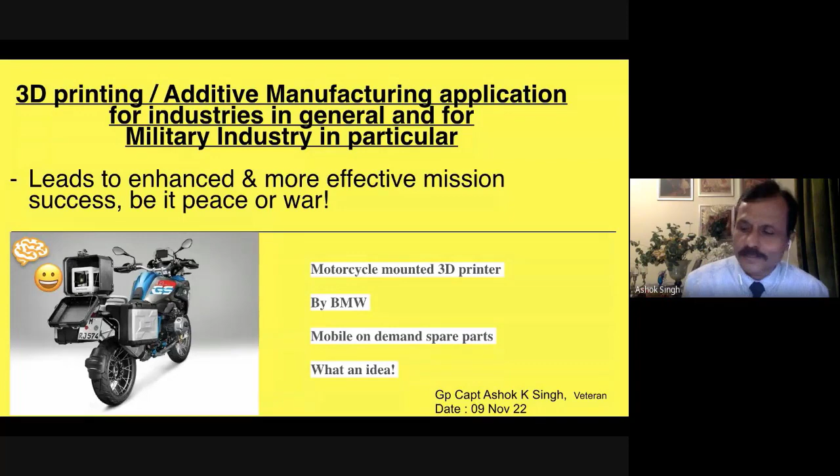So what we see is, you have a BMW motorcycle, and BMW has used its mind very well. They have put a small 3D printer at its back, and this helps support people who are using BMW in their maintenance, getting their spare parts on demand, on site. And I think it's something very apt for the MRO industry moving ahead.

I have personally encountered many times, when dealing with 3D printing technology, that we go to the end user whom we feel would be a good prospect. And when we say, hello, we would like to talk to you about 3D printing, they say, look, kindly contact the IT center or IT department. And sometimes it takes us a little while to drive the point home that what we are dealing with is a machine. It's not something purely IT. So that's a little misnomer people have, and there is still a lot of gray between the black and white.

Coming to somebody from Saint-Gobain, they said that they had 100% return on investment within 6 months of purchasing a printer. Most of the time it is said that it's very expensive. So it depends on what your need is and what the circumstances are, and that would determine whether it is expensive or not. I would give you one example, which is from Vedanta. It's a well-known global company, and they have a mine operating in Jharsuguda. It's a hinterland. There's not much connectivity.

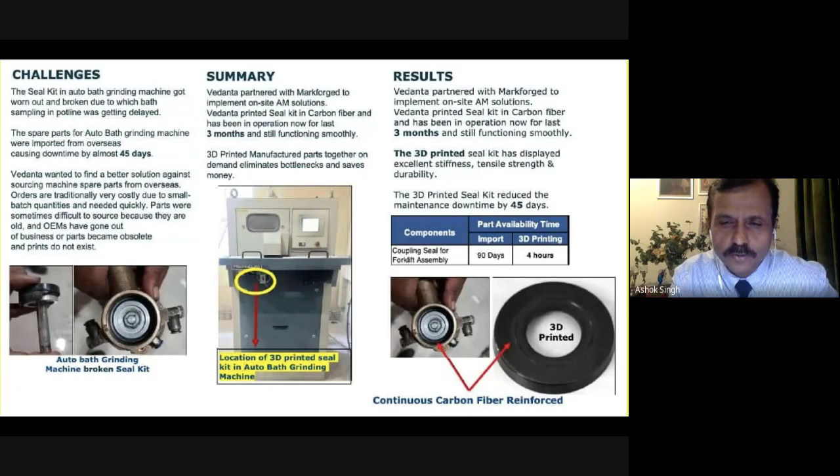With this 3D printed part, they could find that they can use it well, they can get it within 4 hours, and it has saved them a very substantial amount, which they have not shared. Similarly, there's one more part in a forklift, again a continuous carbon fiber reinforced seal, and this they could produce in 2 hours. The import time used to be 45 days. So if your machine is lying idle for 45 days, in commercial parlance, it's quite a huge amount of money.

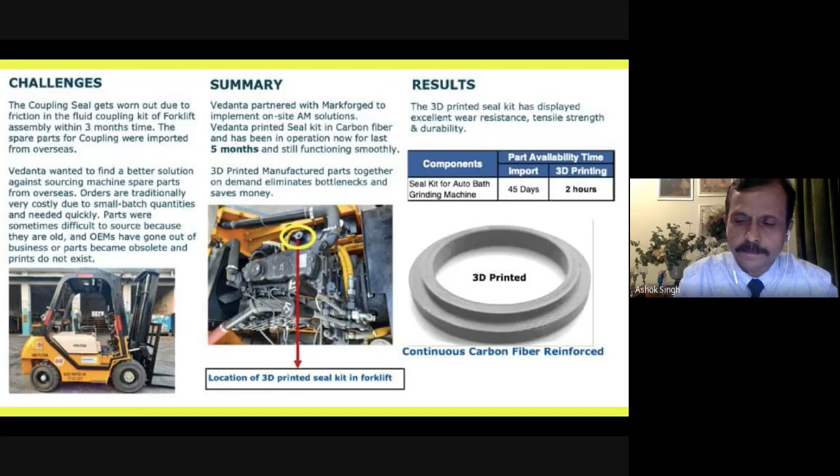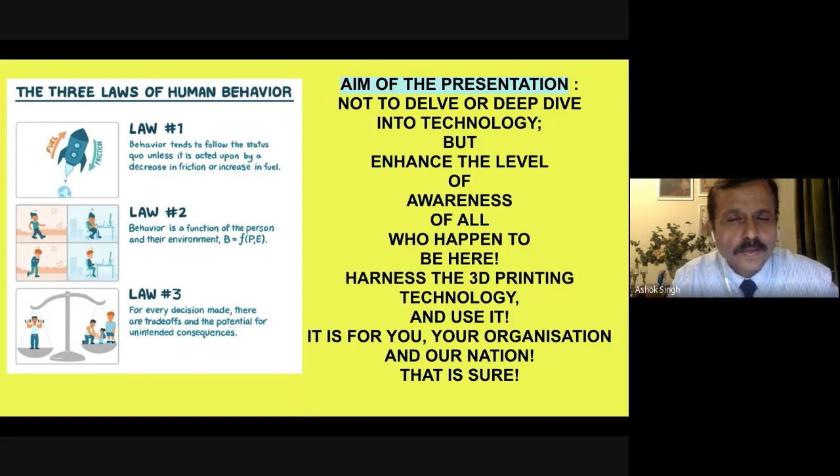So before I start, I would say there are Newton's laws. There are 3 laws of human behavior. Law number 1 is akin to Newton's first law, where it says that you would follow the status quo unless it is acted upon by a decrease in friction or increase in fuel. So basically, if you are nudged, how you would behave would be an outcome of you and the environment. And lastly, your decision is law number 3, where you always evaluate what the consequences are going to be, whether status quo is better than a devil in terms of consequence coming and hitting you.

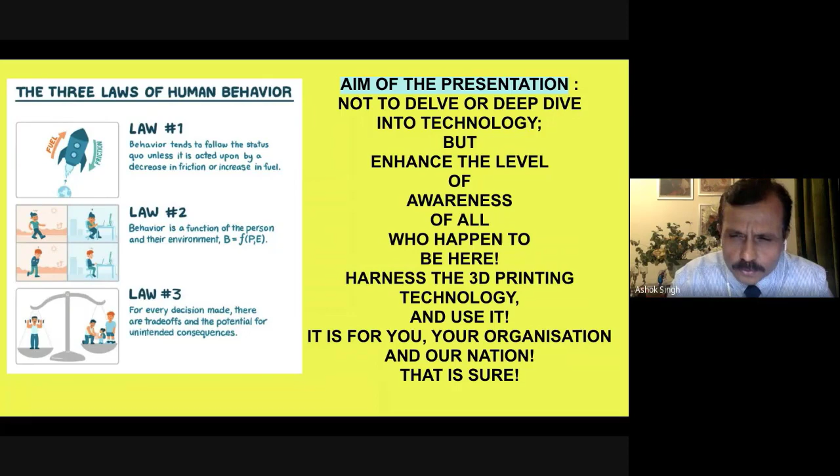So my aim of presentation is not a deep dive into technology, but to enhance the level of awareness of all who happen to be here and harness the 3D printing technology and use it. It is for you, your organization, and our nation, and I'm quite sure about it. Looking at the Indian government, most of the time we are lamenting that the government isn't doing well, but to my mind, government is doing excellent. They are very aggressive, very encouraging and very supportive.

Atal Innovation Mission, which founded the Atal Tinkering Lab, has more than 10,000 schools with these ATL tinkering labs, and each lab has a 3D printing machine, and they have a module where they teach you 3D printing. So that's something excellent, and what you would get will be neoteric innovators. I'm sure in a couple of years' time, they would be romping the streets of the entire country and the world.

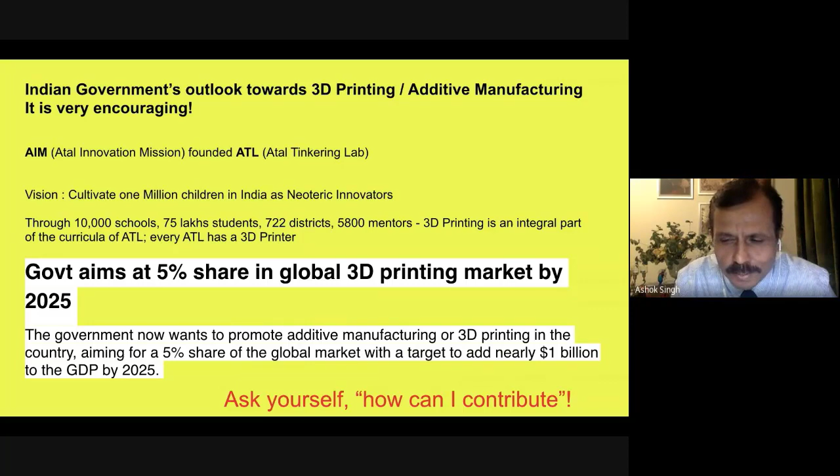Now, the Ministry of Electronics and Information Technology has come out with a beautiful publication called National Strategy for Additive Manufacturing. It's a very well written, well structured publication. If somebody goes through it, it will spell out some clarity on what the government is looking at, and help him or her have a clarity of his or her own. The vision says it should be looking at Make in India, Atmanirbhar Bharat, and position India as a global hub for additive manufacturing development and deployment, like we are globally well ensconced in the automotive industry and IT industry, and create and protect the integrity of India's additive manufacturing intellectual properties.

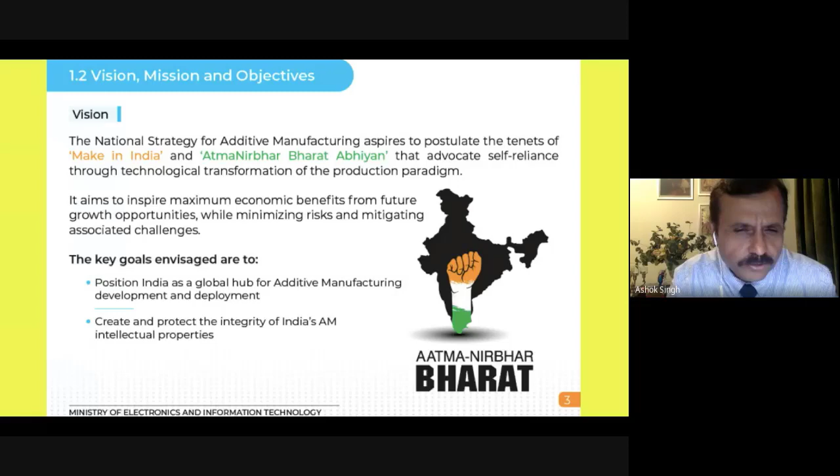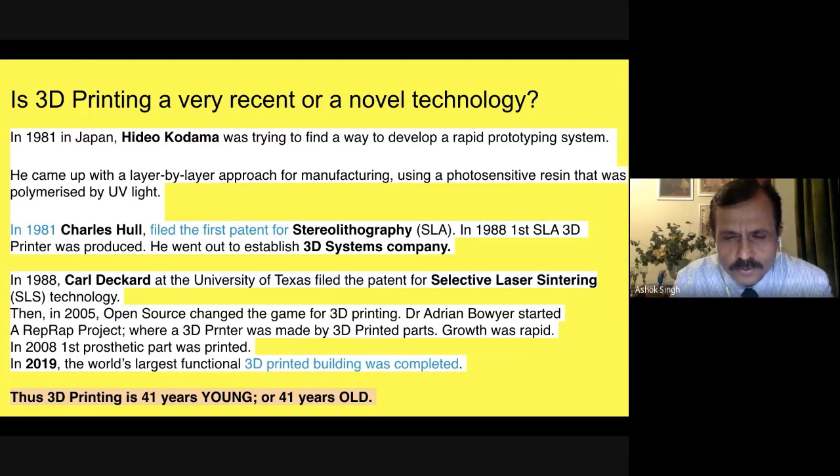Now, a little bit of history. General N.B. Singh just spoke a little bit of it, so I will just rush through. The question is always that it's a disruptive new technology. To my mind, 41 years back it had its advent. So 40 years, whether it is young or old, it is for us to decide. I would leave it to each one of you.

It's normally said that we had the first generation of 3D printing when it had its advent in the 1980s. Then by 1988, you had SLA coming in. In 1990, you had FDM and SLS coming in. And if I fast forward, then we are in second gen. We have functional parts being produced by 3D printing.

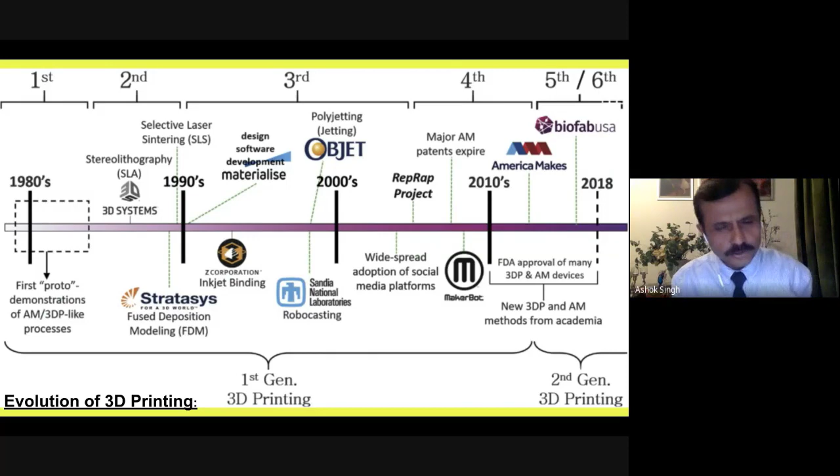You have biological parts. Living Heart Foundation has done a 3D printing of a full heart, and it has been used in a surgery. And they have used a kidney which was 3D printed. Now they are developing tissues. So a whole lot of work is going on.

This is totally my way of looking at it: cellular phone and 3D printing. Cellular phone technology, as all of you know, is very high cutting edge RF technology. But the beauty of that technology is that we don't have to go into Laplace series or Fourier series or Laplace transform equations for telecommunication. We can use it, and a literate or an illiterate guy can use a cell phone with ease.

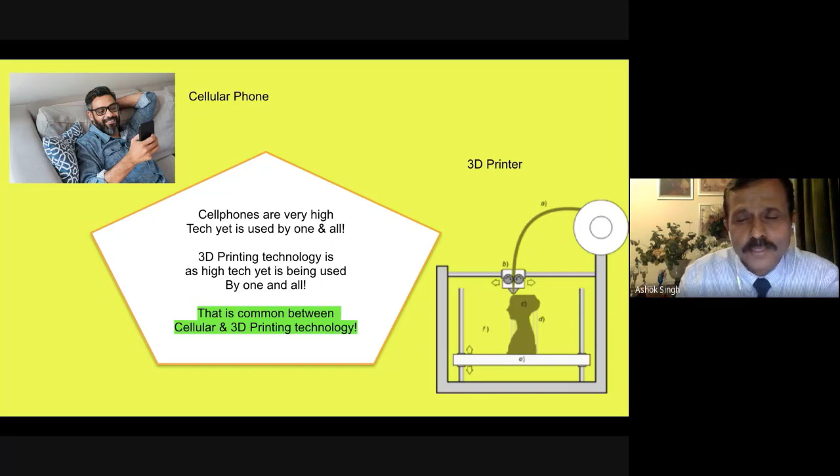Similarly, 3D printing is high-tech technology. At the same time, it doesn't require a degree in engineering or anything like that. It can be used by anyone and everyone. So it's something which is quite adaptable and user-friendly.

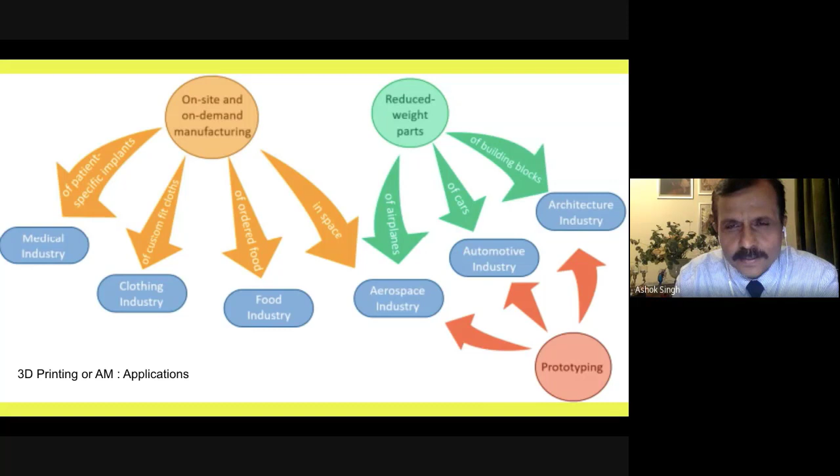Now, 3D printing, its applications, I'm sure most of you know about it. So it's like on-site, on-demand manufacturing. It is for prototyping, and it could be for design considerations. And there's no industry today which is not using 3D printing.

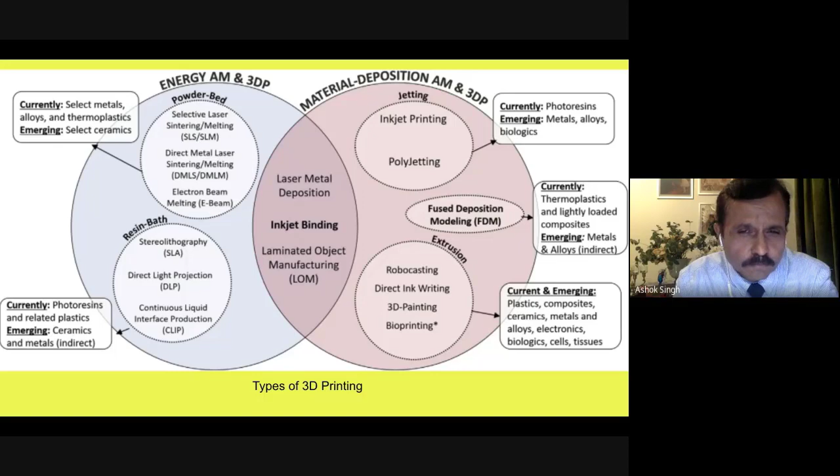Now, there are two kinds of 3D printing. One is energy directed additive manufacturing, and another is material deposition. And there are some which use both of them, which find the intersection in terms of laser metal deposition, inkjet binding, and laminated object manufacturing. I would leave it here.

Now, being people from the forces, I would look at the Ukraine-Russian war. Now, what it has done. If you look at it, it has created something where we all need to learn, and I think everybody is learning a great deal on how the war is being fought and how it's supposedly going to be fought in future. And India being juxtaposed between two adversaries, we think that we have to tighten our belts and be ever ready and prepared, and as such we are.

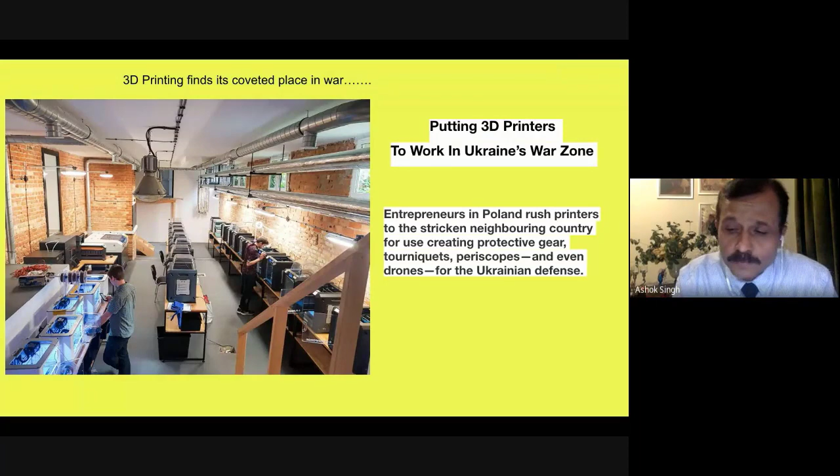So the Polish entrepreneurs who are in 3D printing, they have come up in mass to help the Ukrainian army to manufacture tourniquets, periscopes, drones, and they have also helped them with 3D printing machines so that they can do it themselves.

There's a Project DIAMOnD. This is based in the US, where it is called Distributed Independent Agile Manufacturing on Demand. Now, this is being used to help Ukraine get whatever they need, especially for medical and healthcare, because a lot of people are getting injured in the war, both civilians as well as military. So you can use 3D printers which could be in any part of the geography, anywhere in the world, and you can pass an STL file over the cloud and you can get what you want. So that is something great.

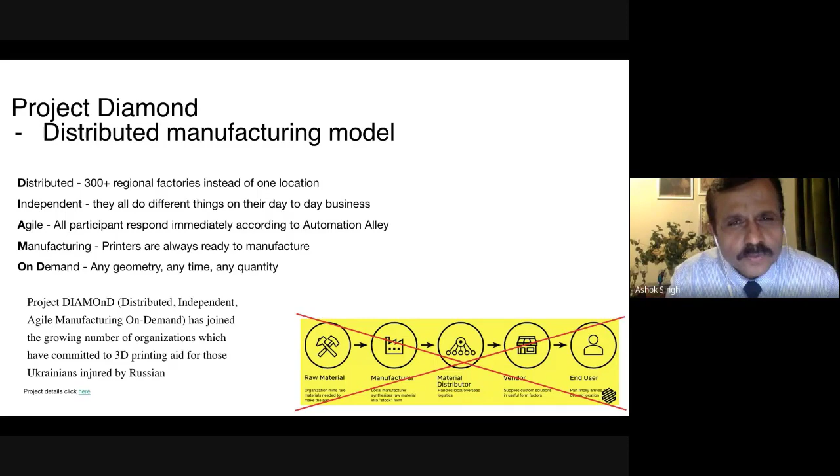Looking at 3D printing. Now, I was quite amazed when you see Ukrainians, and maybe Russians, I don't know, are using 3D printing and 3D scanning to scan their heritage sites. Something very ingenious, innovative and forward-looking, where they will have a scanned CAD file, and then tomorrow, in case they have to rebuild, they can rebuild the whole building the way it was once upon a time.

The war is going to be a long drawn process, and it's been already 7-8 months, and the boys and the girls have to go to school, and schools are demolished, destroyed, bombed, and so you have a 3D printed school, which is already up and running in Ukraine.

Something to be noted for the military professionals is, Russia is facing a big challenge in terms of all the support which has been withdrawn from Russia by American and European companies in 3D printing. It's not only in 3D printing, but even companies like Coke and Pepsi have wound up and gone. So they are in great grief, I would say, because I have had some personal interactions with them.

Czech, they are also coming up with anti-tank barriers. It is in the civil construction domain. And they have also helped them with 3D printers, where the Ukrainian army can 3D print an anti-tank barrier wherever they need in the field itself.

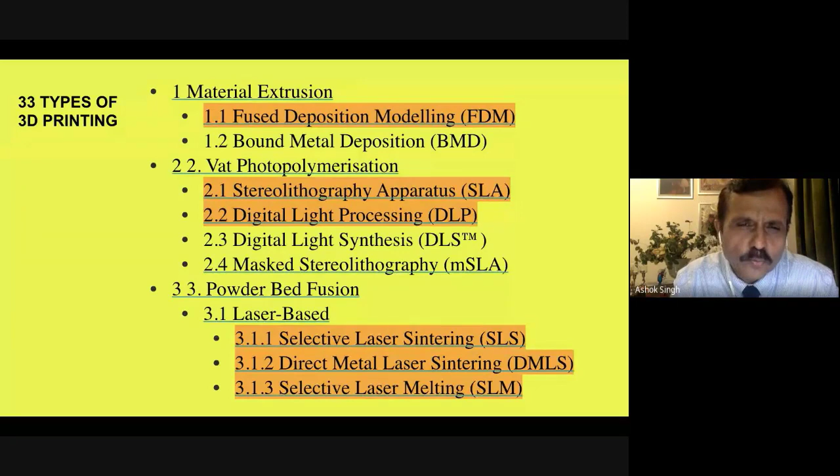There are 33 types of listed 3D printing technologies. I won't speak about them, but this is for academic interest that it's been put there. FDM, SLA, DLP, SLS, DMLS, SLM, these are some of the well-known ones. So there are multiple of them, because one of the technologies may not be a one-stop solution. So there are different solutions for different kinds of 3D printing. Could be for the medical world, automotive world, could be for space and things like that.

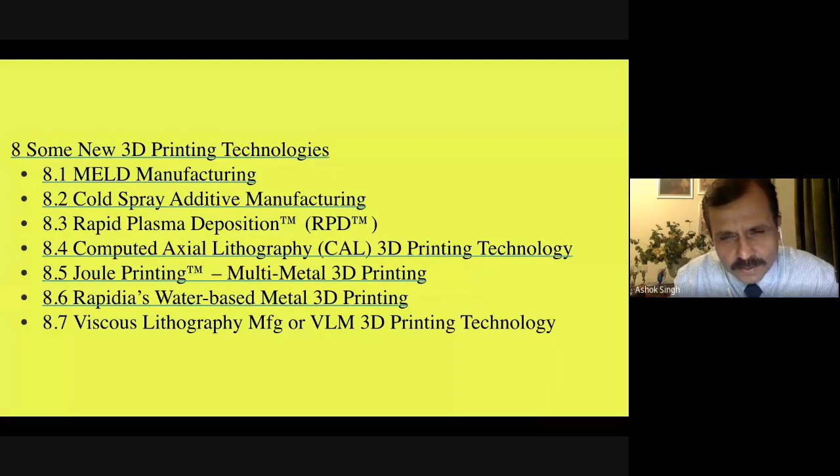Now, how is the globe doing about 3D printing? Most of you would know, and I just put some snippets from here and there to make a collage out of it so that it works out to make some kind of implication or analysis out of it. So Joe Biden has come up with the additive manufacturing program. That shows how well the American government is looking at it. And Boeing and Northrop Grumman have joined him.

Boeing established a center of 3D printing long back with a company called Stratasys. And long back, they had printed a whole wing of an aircraft. A very, very surprising phenomenon. But their tests and trials are going on. Now, the UK, they have 3D printed drone swarms. And today we know how drones are working wonders in the war which is just happening.

Now you have rocket engines which are 3D printed, and rocket engines are using 3D printed fuel. That is already tested, and they have tested it successfully. Probably they would be making it operational in due course of time. The French Navy, they have printed a ship propeller, almost 1 meter in diameter, and it's quite a job. And coming to the medical field, one prosthetic eye has been put to Steve Verze. That was in November 21. Of course, prosthetic limbs, etc., are already there for a long time.

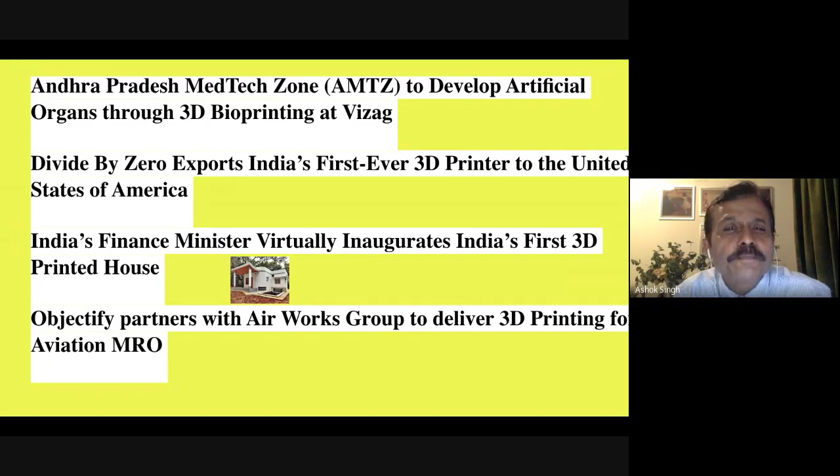Objectify, it's a company in multiple locations in India. They have partnered with Airworks for aviation MRO. Incredible AM, which is in Pune, they have delivered 600 3D printed patient implants. It's quite a phenomenon, I would say, for those who are aware. Otherwise, these were all being imported at exorbitant costs. Amace Solutions, Bangalore, they have developed a metal 3D printer.

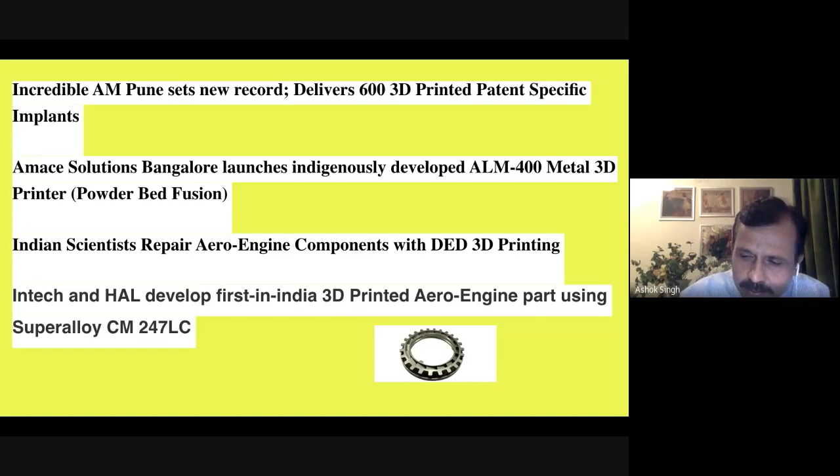And here I would say that armed forces should look at some of these companies which are developing indigenous 3D printers and indigenous materials, where they join hands and support each other so that we are indigenous in due course of time. Atmanirbhar. You have DRDO doing aero engine repair and HAL developing an aero engine part. And when it comes to aero engines, it also involves CEMILAC, and therefore CEMILAC is well embedded here, and they have done a very good job, and the tango has gone very well.

Looking at the armed forces, in 2020 MES they have done defense like Southwestern Command in the Air Force. They printed houses, and they have also printed sanitary blocks for standalone lavatories in field area near Jaisalmer. Then UAV, which is done by IdeaForge, it's all 3D printed.

At DRDO in ARDE, I have personally seen this particular pistol being developed. It's a combined work for the Army and the DRDO scientists. And it has used a tremendous amount of 3D printing.

HAL has signed with Wipro 3D, something where they would like to jointly develop and help each other. It makes business sense and it is a progressive business practice, something the forces also can look at adapting.

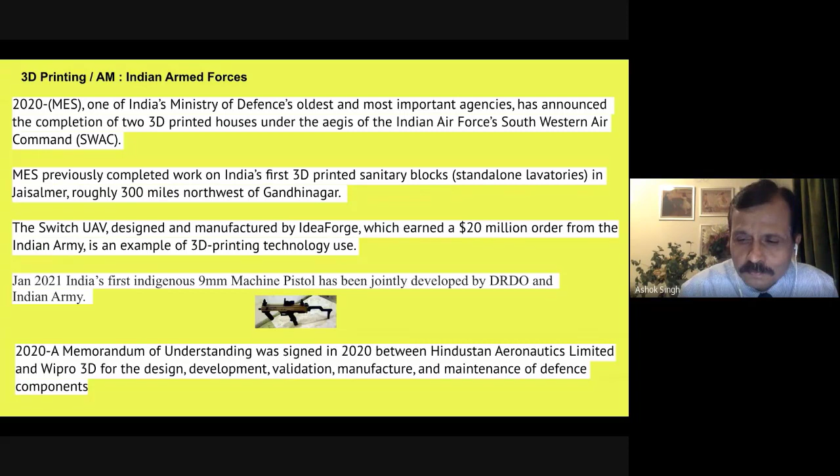IAF has definitely established a center for 3D printing in Nasik, and I'm very happy about that. And I'm not sure, but this is from all open source, that more than 300 items have been already 3D printed and they are in operations, and it's a fabulous job. But the way we have started is just the tip of the iceberg. We have a long way to cover.

CEMILAC has been very well involved. One of the gray areas is material certifications, process certifications, machine certifications, and therefore I found that CEMILAC has done a great deal of job, and they have gone hand in hand with the end users, both 3D printing companies and the forces. And we have things which are sitting in the aircraft, aerial platforms, and flying.

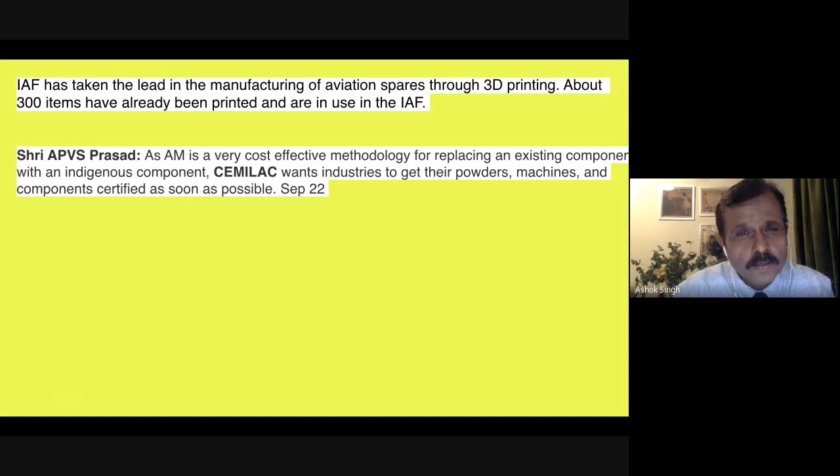Now coming to why 3D printing for Air Force or armed forces. It's something most of you know, like the small batches are there, means volume is low. You can have distributed manufacturing. Say, look at aircraft, if we have Su-30 in 10 locations, then you can print something and make it available for that Su-30's MRO, which is close by.

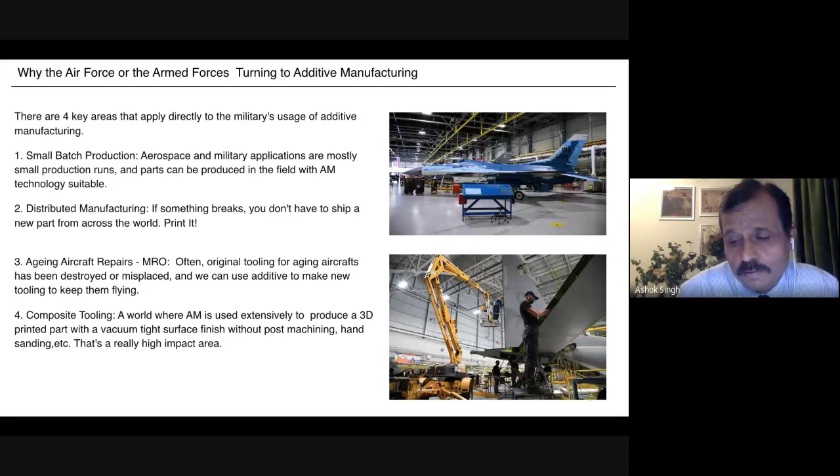Then, of course, legacy and obsolescence management and reverse engineering. And then composite tooling, it takes time, it takes energy, it takes resources, and at the same time, it takes multiple iterations before you get the right tool. And here in 3D printing, you don't need that. You can directly print an end-use part, and therefore it's a suitable technology especially for aviation MRO.

Wars have been won or lost primarily because of logistics. So here you have got logistics redefined through 3D printing, where you have got instantaneous MRO parts, you have got a digital inventory, and optimizing for performance.

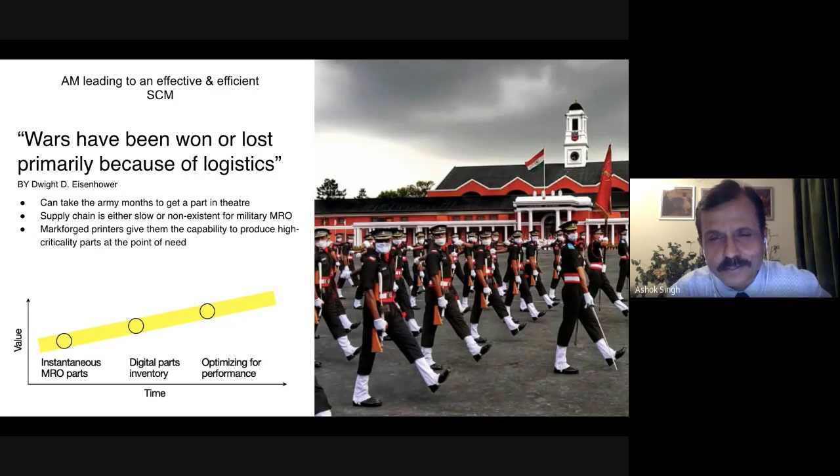Unfortunately, despite that, I had talked with many people in the forces, in the services, where I say that you start with digital inventory, at least identify 100 items and make a digital inventory. But I don't know. I think the day is going to come soon where we will have a couple of digital inventory files, and instead of holding something in your racks in the warehouses, you would be holding something as a digital file.

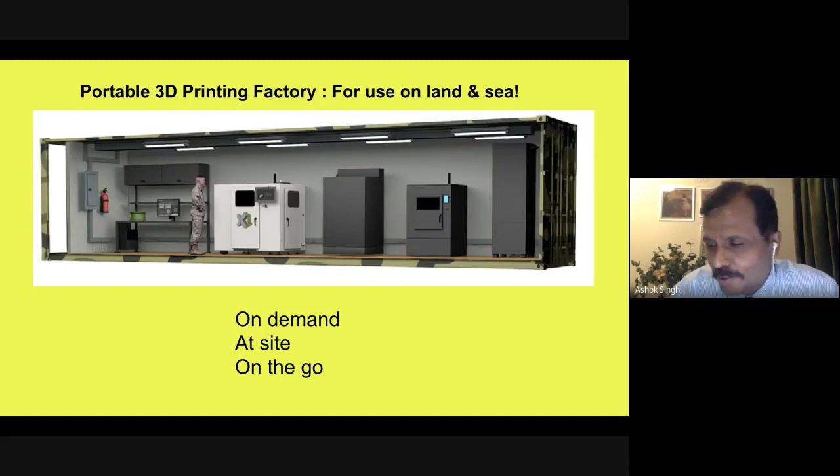Like Sir was telling, it takes 14 days for a critical spare from the US mainland to maybe a country like Afghanistan or Gulf war locations, and now like Ukraine, probably. So when you have a 3D printer as a part of your rapid logistics, you can obviate all those delays.

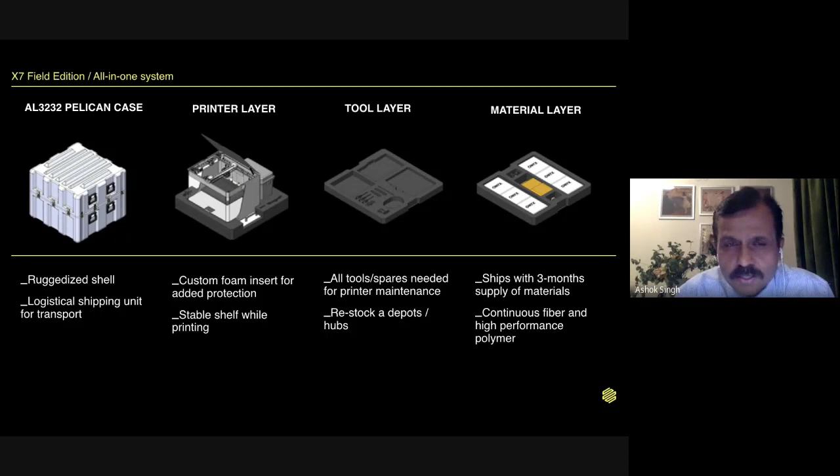One such small 3D printer is the X7 from Markforged, and this is helping somebody to put it in a case, and then you can carry it to the field and produce the parts you desire or need.

Now, most of the people have a little kind of suspicion or anxiety about whether the parts will work or not. But today we have carbon fiber reinforced parts. They have outdone aluminum parts, they are 40% lighter, and their mechanical properties are even better.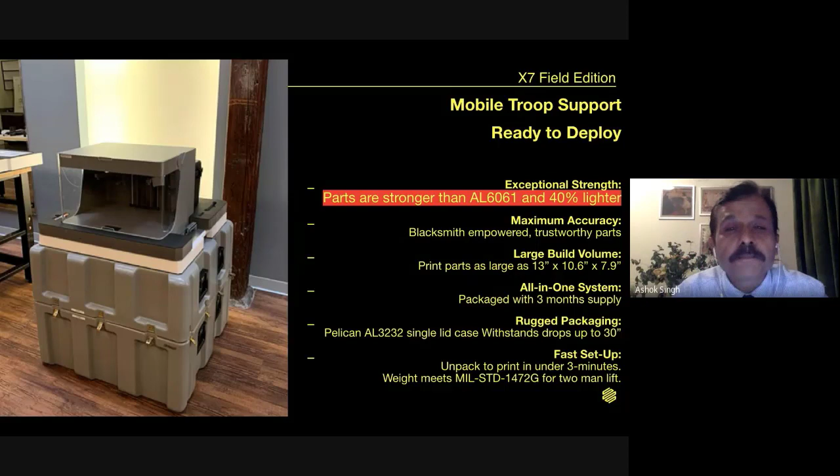Now, what 3D printing does is called distributed manufacturing. It's very apt for the military, be it Navy, Army, or the Air Force, where you have a digital inventory and a global manager, and the global manager could sit anywhere, even not in your country. From there he could control the machines, and based on where it is required, he could fire that particular 3D printer which is in close proximity and get things done.

So you can get it immediately. You have a digital inventory, a digital toolkit, and all those libraries which are again digital. One very important thing here is your data security. The digital world makes you more vulnerable. ISO 27001 certification is for data security. If you have it, your data security is in place. Not that it cannot be breached, but this is the standard which is globally accepted.

And since you have the data with you all the time, this data can be stored for analysis, and in real time, with a feedback loop system, you can improve upon what you're doing. Forces and industries have to be prepared even for unexpected challenges, and it is always unexpected. So you have to respond faster, be secured, be confident, and field deployment and flexibility is on the go, on demand, on time.

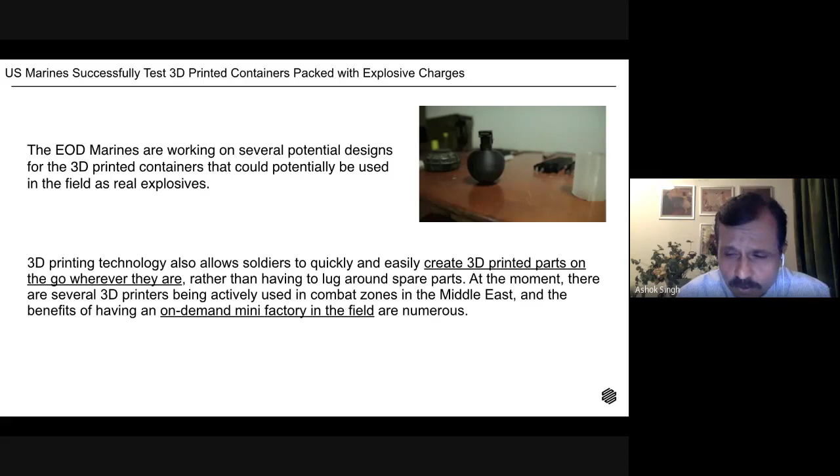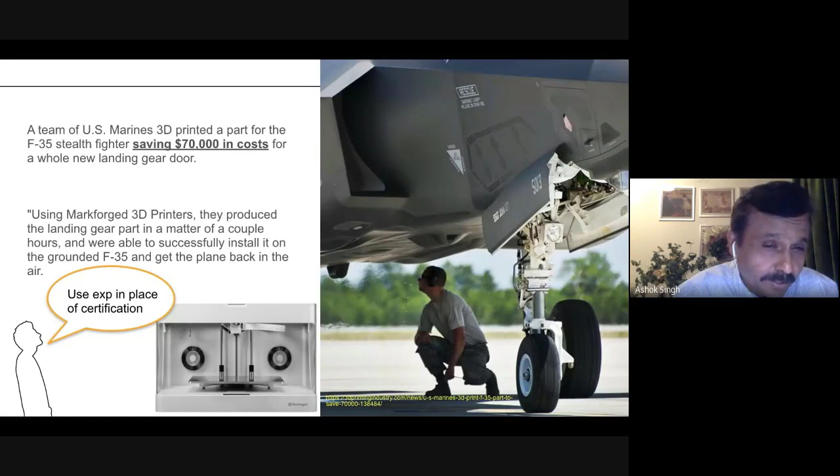Now coming to aircraft. American forces are deployed all across the globe. In this case, the F-35 stealth fighter had some issues. So they 3D printed the component, fitted it on the aircraft, and the aircraft took off. Now the question is, is it correct? Is it the right aviation practice? Maybe no. But here I have said use experience in place of certification, because it is actual operation.

Now, challenges. 3D printing or additive manufacturing is not a one-stop solution for everything. You have technological challenges: materials, process implementation, and post-processing quality assurance. All these need to be standardized. IT standards are needed. There's a skill set shortage. I think DGR should be doing something where we can sit with them and do some skilling of our own people to go into the market.

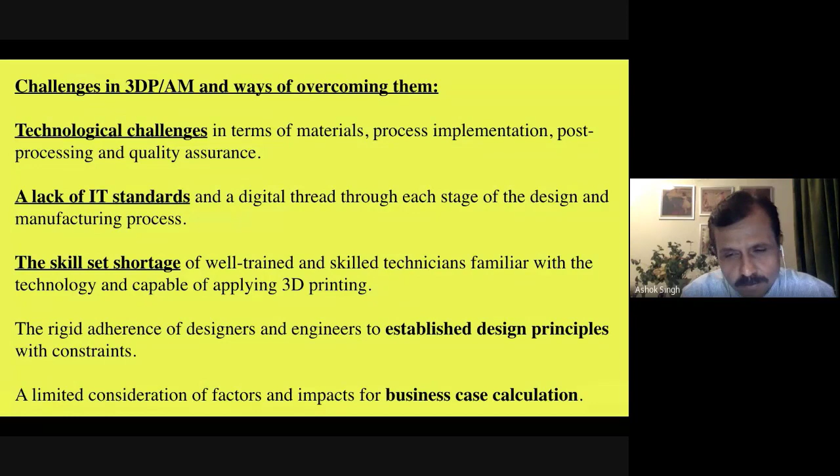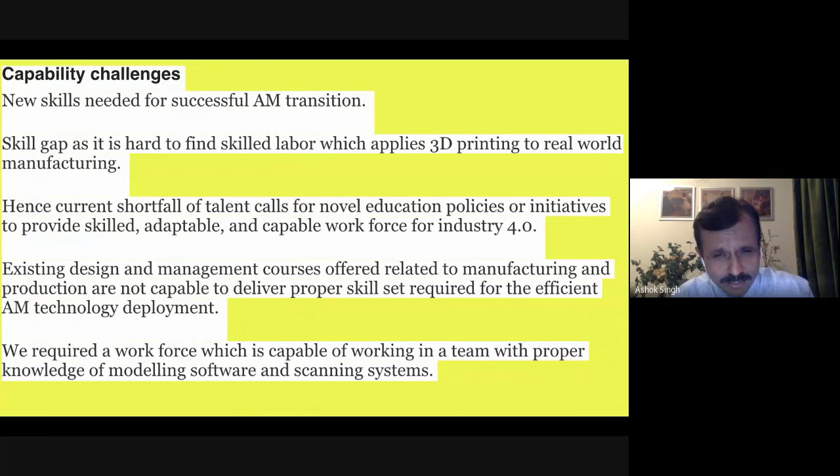Design principles are quite rigid, and 3D printing design principles are yet to evolve to the level where you have those norms. And for anybody other than services, even in services, you have a business case calculation. How do you calculate whether you would go for 3D printing or not? The inputs are not so well placed in the market. There are capability challenges, skill set being one. Design and management courses related to manufacturing and production are not capable of delivering proper skill. We need to develop a force.

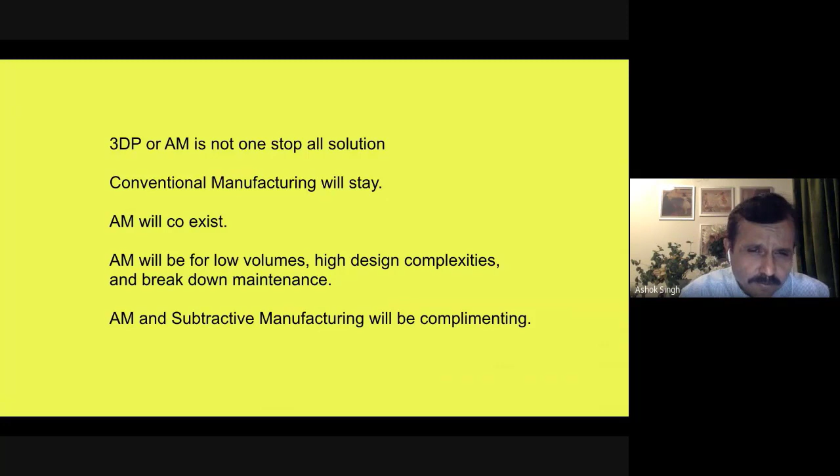It's not a one-stop solution. Conventional manufacturing is going to stay. Additive manufacturing will coexist, for low volumes, high design complexities, and breakdown maintenance. Additive and subtractive manufacturing will complement each other. How do you decide whether to go for it? These are laid down processes where you evaluate, make a business case, have a roadmap, and it does need an organizational shift in thinking in terms of MRO and manufacturing.

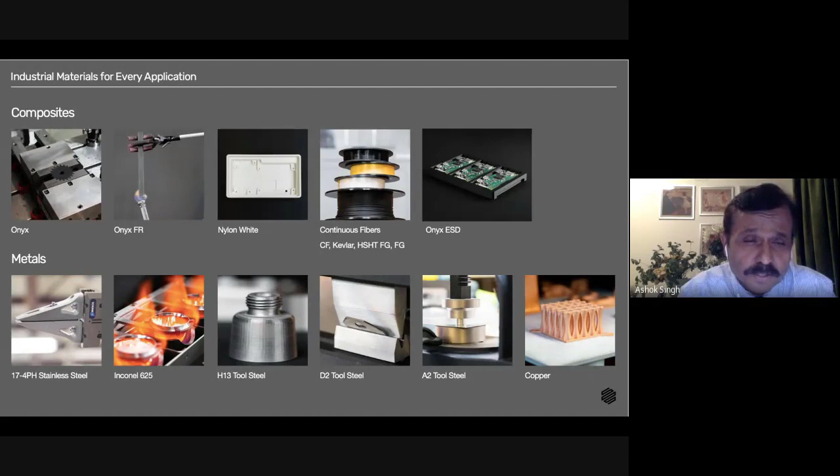Coming to materials, many people have a lot of anxiety about it. They are not sure whether 3D printing materials can actually deliver on site in operations. You have all kinds of 3D printing materials today, hundreds of them. Some are listed here, both metal and non-metal. I would say 3D printing material has come of age, and today some of them can match the characteristics of a normal metal with ASTM certifications.

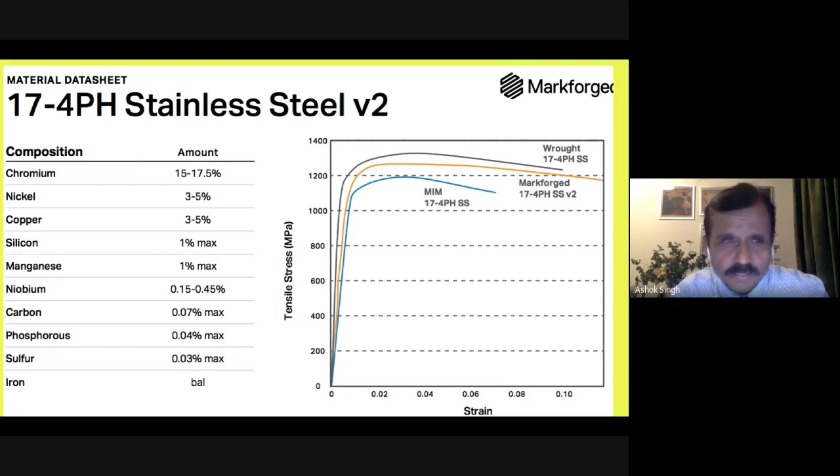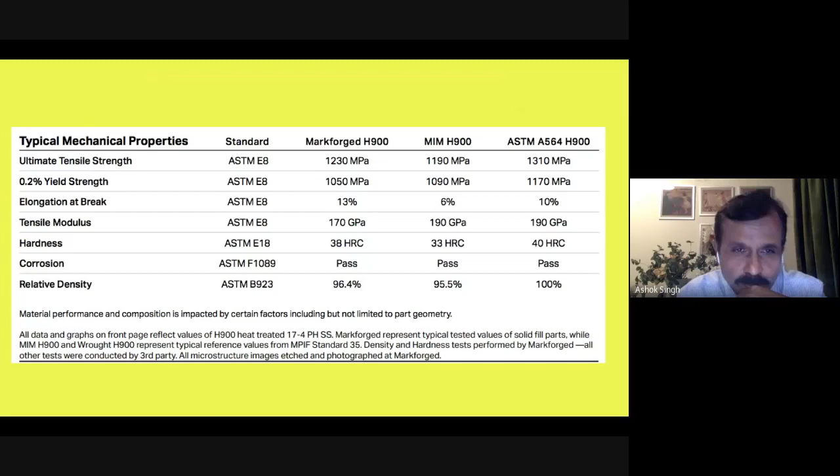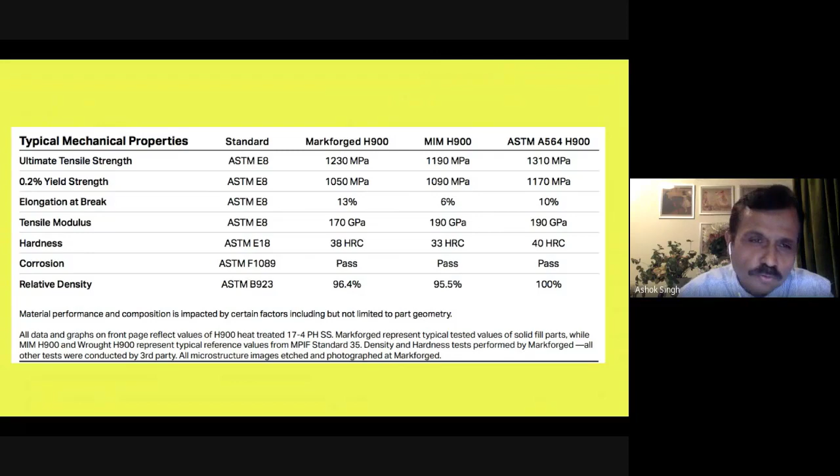This one is 17-4 PH stainless steel. If you look here, it is ASTM E8 standards, and the equivalent is ASTM A564 H900. The material properties are quite comparable. Therefore, you cannot have exact replication of what you had in a conventional setup, but you could have something comparable, at times better, at times a little less, and with the design considerations in place, you can get what you need and have a functional part. Cost effective, yes, people say it is cost effective.

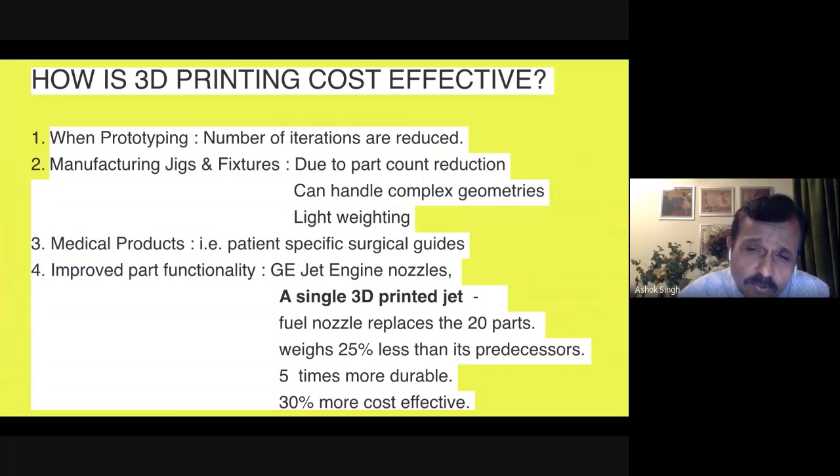So now looking at 3D printing costs. It's quite simple, like you have a material cost, assembly cost, tooling cost, production cost, and inventory cost. So these are quite simple to understand and assimilate. I will leave it here.

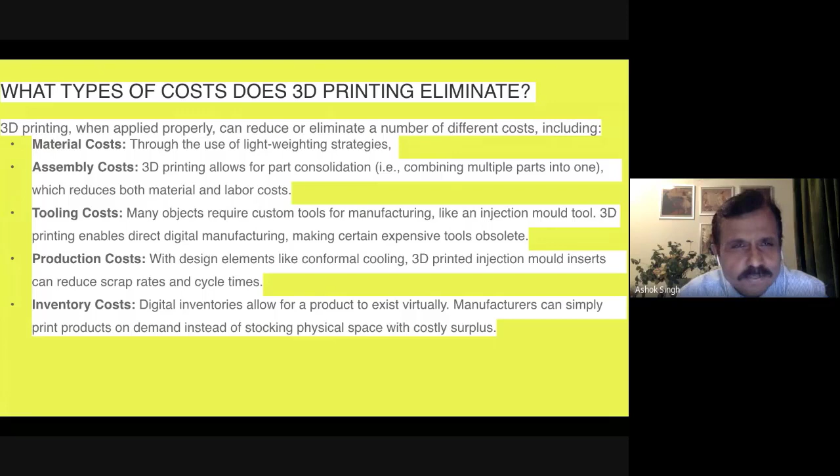Now, 3D printing. So what is here today, we need to be better off tomorrow. So the challenges which we have faced today should be obviated in the times to come. So you have now in-process micrometer scanning. That means when your part is being fired, it is under production in 3D printing, at the same time it is being measured. And that measurement is being matched with the CAD file.

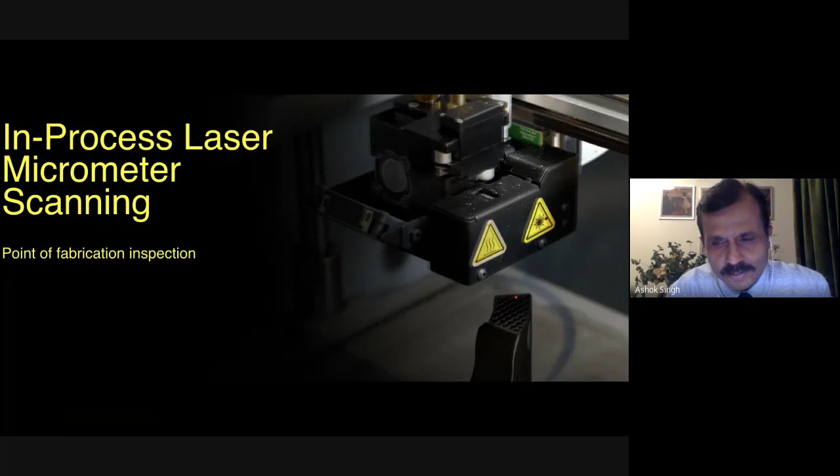And so when the part is ready with you, you have a report also with you of what is the deviation from the CAD file. And those deviations, the AI is set up, it accommodates them in its next 3D printing, and they are obviated. So this is what is next in line, and I think its advent is already done.

Now coming to negatives, like for everything there's a flip side. So you have cases where people have been charged with a criminal act and they have been indicted and jailed. One such case is in the UK, where somebody was supplying guns. Then Kent Edward, he was again manufacturing firearms. So what I see is that additive manufacturing in times to come is also having its negatives, and therefore measures have to be taken well in advance that they are checked and mitigated.

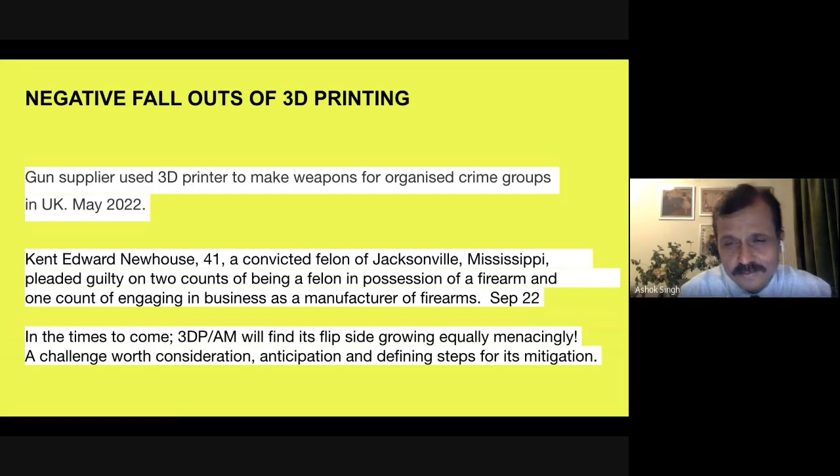A little think about how do we go ahead? So surprise, like wargaming. We all know wargaming. It may be well thought, all possibilities considered, yet we can get surprised. Look at the Ukraine-Russia war. I'm not much of a wargaming guy. I'm basically an MRO guy, but nevertheless, when I stretched my imagination, I found that neither Russia nor Ukraine would have wargamed an operational scenario as has unfolded now.

There are two nations warring while several nations are active, supporting one against the other. And I have not added, but there are certain nations who are supporting both. The support is real, situational, physical, material, and psychological. I don't know if in India also there are such veterans here who have ever wargamed something like this. If we have, I would be very happy.

Therefore, the need is to ride ahead of the technology curves. If that is not in reach, one should ride the leading edge of the curve. That's what I think. And if there too one is lagging, then the adaptation of David's kind of strategy against Goliath be envisioned. What do I recommend? Every soldier should be an AM thinking soldier.

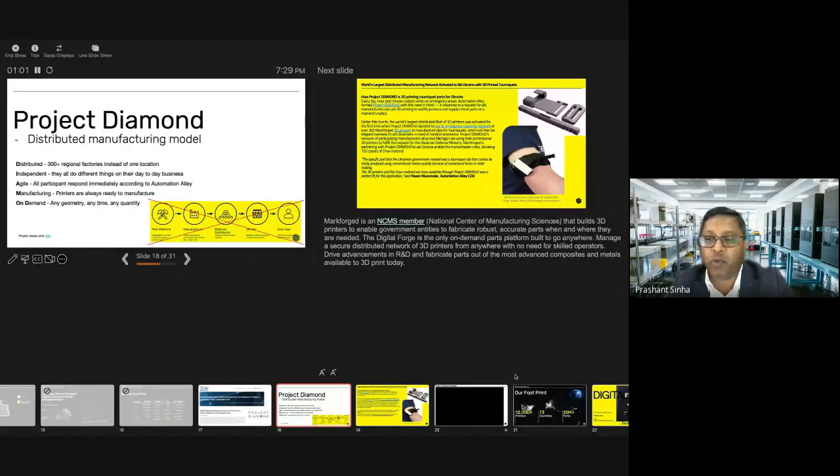Now, our Digital Forge is the only on-demand parts platform today which can go anywhere. You can manage a secure distributed network of 3D printers from anywhere with no need for skilled operators. You can drive advancements in research and development and fabricate parts out of the most advanced composites and metals available to 3D print today.

We are privileged to have amongst us Mr. Sarang Nerkar. He is a gentleman of unlimited capabilities. In fact, I have not come across any other person as versatile in technology as he is in my entire service span so far. He is working on AR, VR, and a host of modern technologies, especially not in the theoretical construct, but in translating that into the executive domain. So I will request Mr. Sarang Nerkar to share his thoughts in about 3 minutes or so on this platform.

Thank you very much, sir, and thank you very much for having me here today. As sir mentioned, we are a company that works in the augmented reality and artificial intelligence domains. I would like to mention something about 3D printing. Along with 3D printing, sir, one of the key things intellectually and in terms of intellectual property is 3D design, and that is something we have been working on significantly.

We have utilized 3D printing technology significantly in our product development. We are a company trying to work in the defense space without raising any external investment, entirely bootstrapped, based on our savings. That is why 3D printing technology has really assisted us in rapidly prototyping a lot of our devices. I would like to show you one of the devices that we have 3D printed.